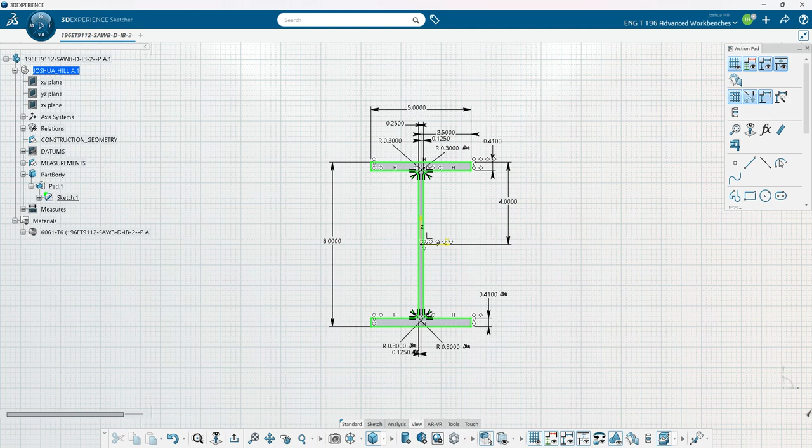As you can see here, what we're going to want to do is make a stress analysis on this.

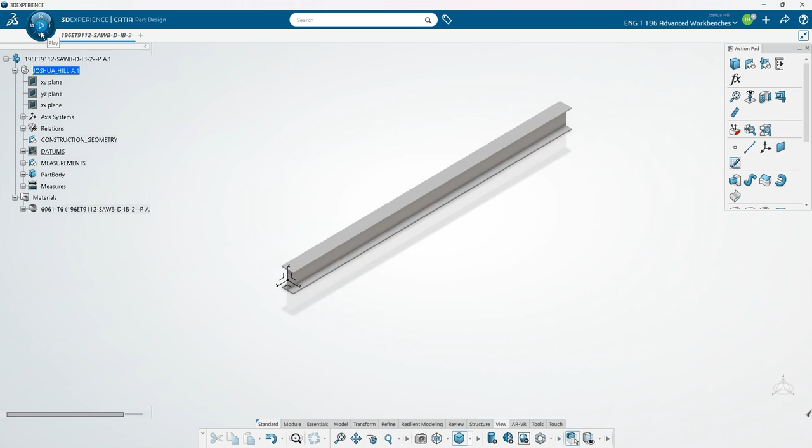So what you've got to do is go up here to the compass and pick static study. In order for this to work properly, you need to have a material, a restraint of some type, which they call a boundary condition, a load, and then you can run the simulation.

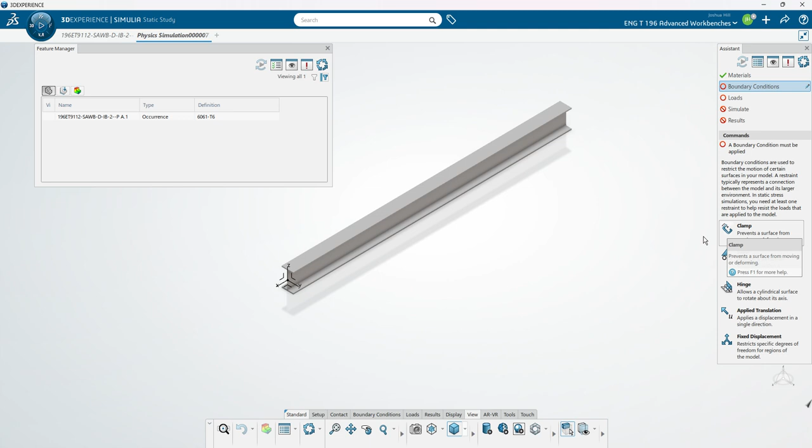So like I said before, the material that I chose was a 6061 T6. The boundary condition that I'm going to use is a clamp, and what we're going to do is put it on the opposite side. Clamp it down. Next, we're going to apply a load.

We're going to use pressure. We'll pick this surface right here and apply a pressure of 100,000 psi. As you can see here, it applies these to let you know that that's where the pressure is coming from.

We'll come here to simulate and start the simulation. Now sometimes, depending on your PC, this may take a minute or two, but it generally runs pretty quickly. Just waiting for the computer to do its computations.

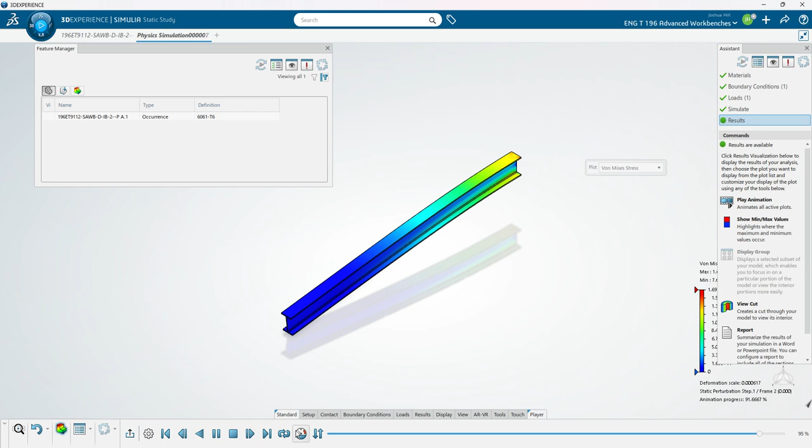And here are our results. From here you can do a play animation, which will move it. Personally, I would change the speed. That looks good. And then from here you can see the different results that you would get. This right here that it's displaying now is a von Mises stress test.

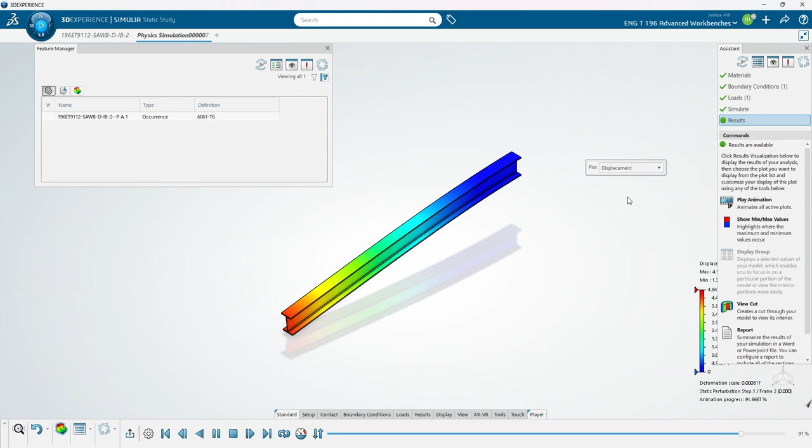This is a deformation. This is a displacement. The factor of safety. Reaction force vector, as you can see, shows you which way it's going to stress there. Compression and tension is the last one.

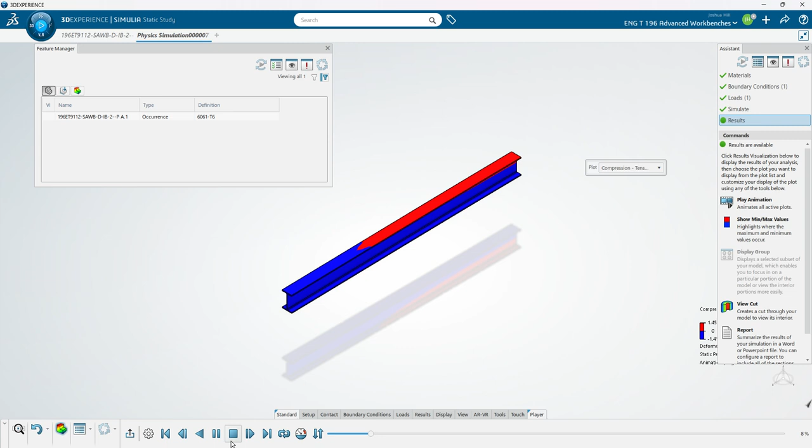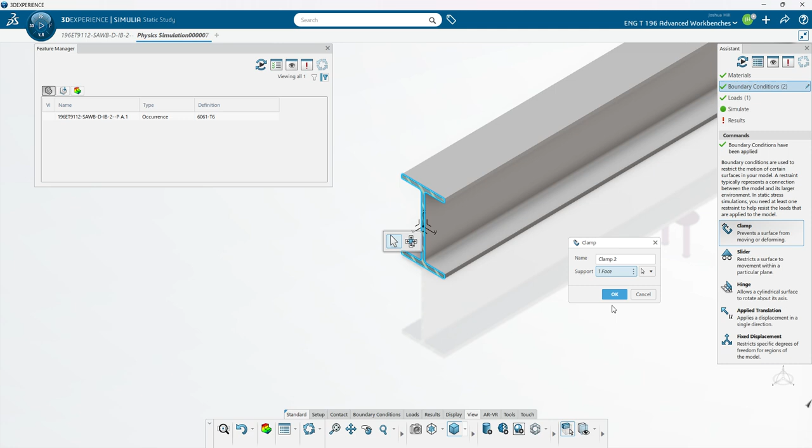This is where you have to rerun the simulation. Yet again, this sometimes takes a couple of minutes, but it's usually fairly good and accurate and quick.

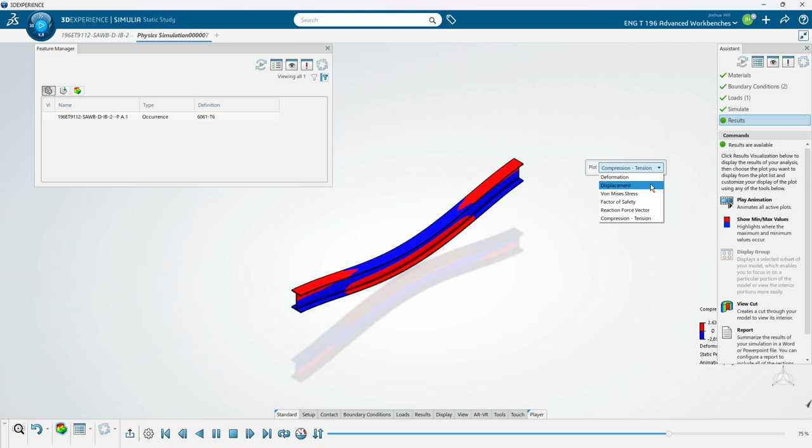Here are our results. Let's play this animation again. So here you can see the middle of it is going to be pressed down. Here's the reaction force vector. The factor of safety.

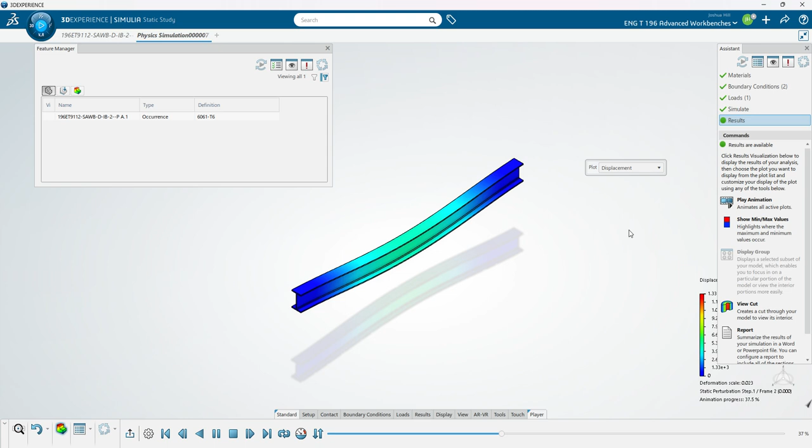The von Mises stress, displacement, and deformation.

From here you can create a report. You come down here and click on the report. Here you would put in all of your company information, address, URLs, phone numbers, fax, all the needed information. Once you select OK, it will bring up a Word document for you to then hand off to your supervisor or the engineer at the plant you're working at.

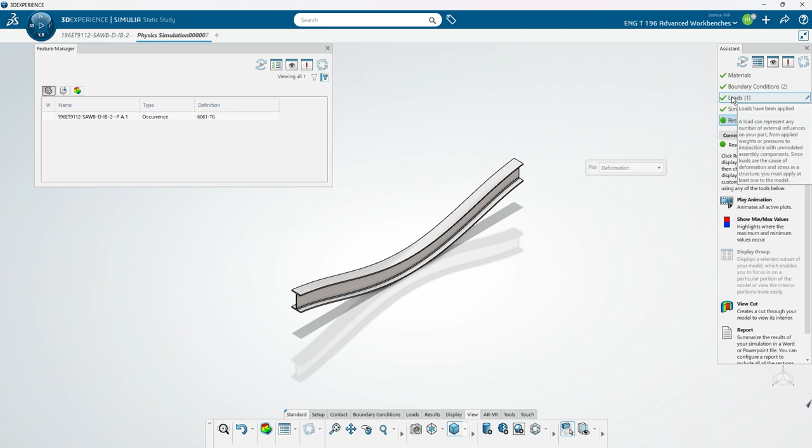Let's do one more change in this one. We're going to change the load. So over here we can see that we've got pressure here, but we're going to delete that. Let's take that one out and put a load of pressure, but coming from the side, using the same 100,000 pounds per square inch.

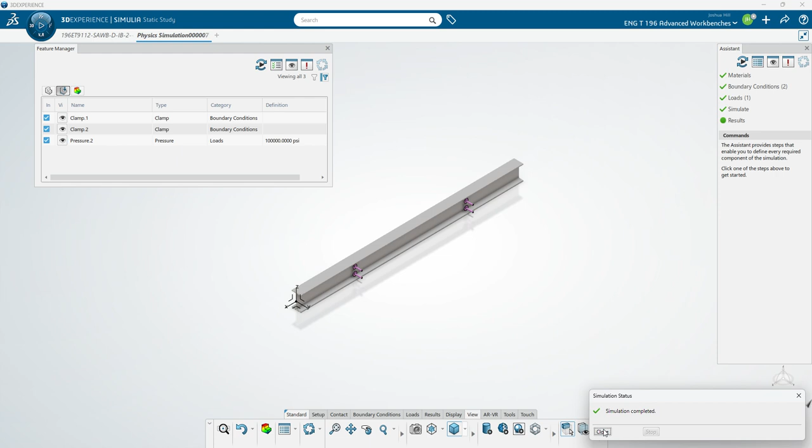And let's run the simulation again. This generally takes a minute because it's got a lot of calculations to make in a short amount of time. Our simulation is complete. Let's look at our results and play the animation.

Now you can see that it bends from the middle but from the opposite side. You can choose any side that you want. Some of these sides, if you were to pick, let's say for instance this line right here, you would have to make a handle in order to get this to work properly.

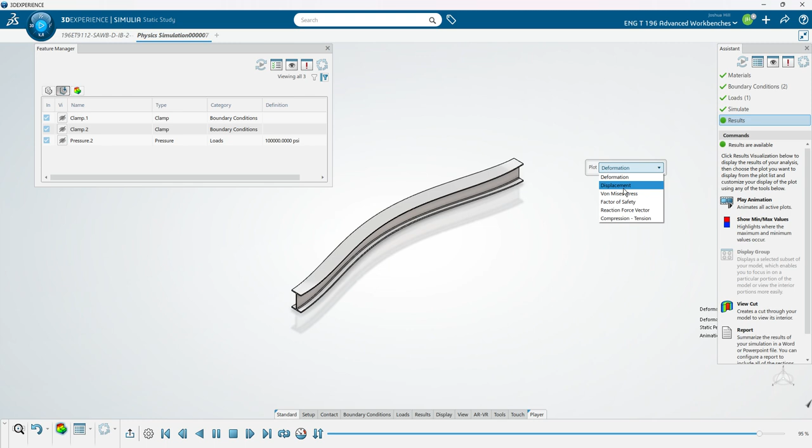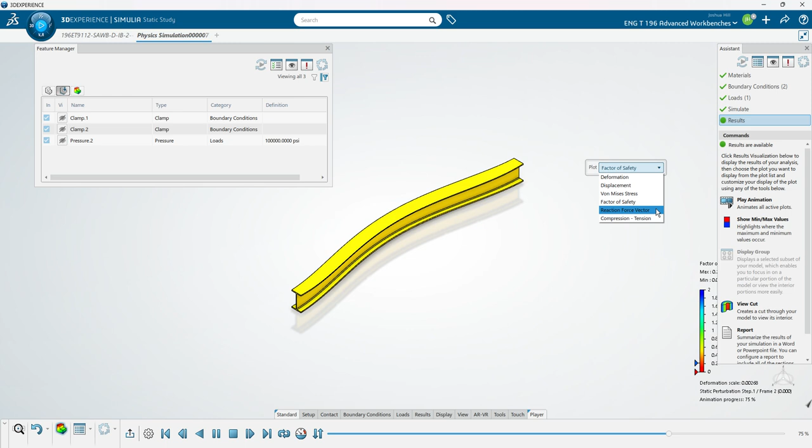Here's the displacement, von Mises stress, factor of safety, reaction force vector, and compression tension.